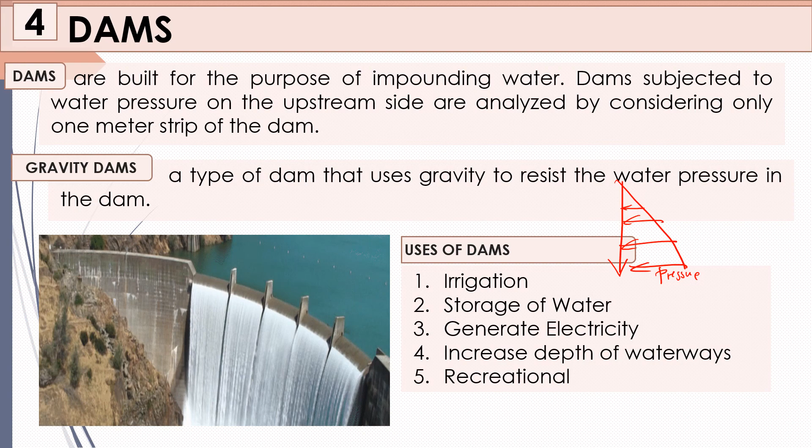We know that the deeper we go into water, the pressure increases. It is varying - the deeper, the larger the pressure. So this means that when we build a dam, we need a type of dam capable of resisting the water pressure given to it. One such type is the gravity dam.

Gravity dam is made of concrete, because concrete is the cheapest material to use. And where is concrete good? If we have pressure, water pressure, where is concrete good? Concrete is strong in compression.

That's right. So if we have water, it compresses or pushes the dam. If you push the dam, if the gravity dam is massive, because concrete is good in compression, it means the dam will not rotate. So imagine if the dam is not massive or its resistance to pressure is not enough, what will happen to your dam?

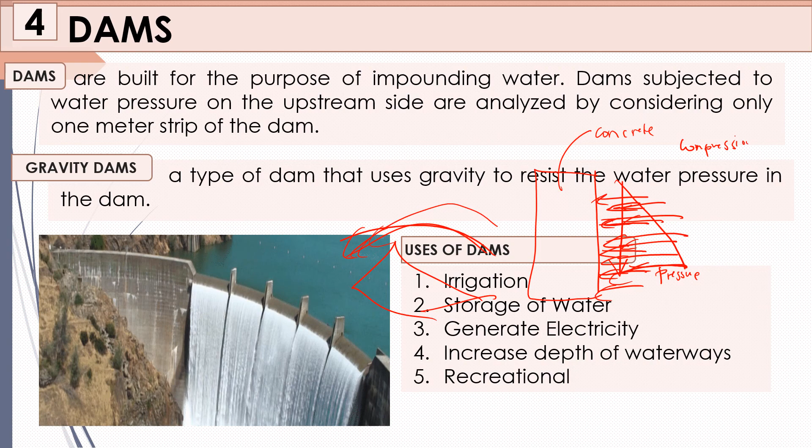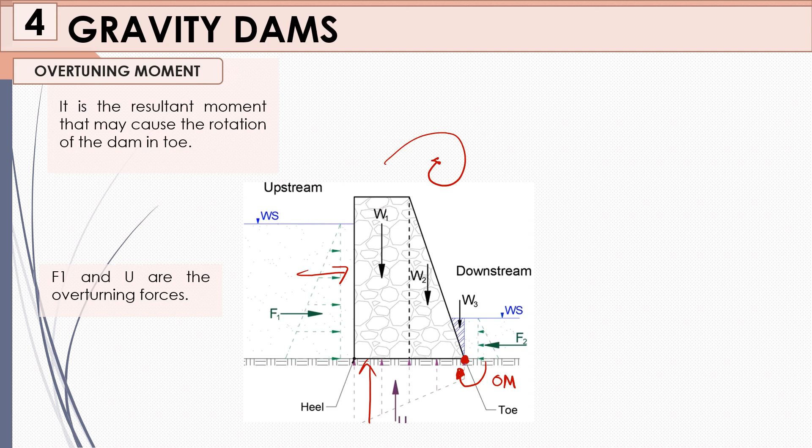At ano ang tawag doon? That is your resisting moment, or pwede rin natin itong tawagin as your righting moment. So itong righting moment natin will resist the overturning of our dam.

So, if your overturning moment rotation is clockwise, ano naman yung magiging rotation ng ating resisting moment? Kasi i-resist yung overturning moment eh. Yes, that is correct. That should be counterclockwise rotation, para ma-resist nga.

And sino ba yung mga forces na magre-resist or magka-counteract doon sa forces na nagbibigay ng overturning moment? Those are the forces, which is your gravity force, which is the self-weight or the total weight na kine-carry ng base ng dam natin, and also the F2. Yung F2 natin is yung hydrostatic force 2 ninyo. Tutulong siya sa pagpigil ng pag-rotate ng dam natin.

But if wala tayong tubig sa downstream, ibig sabihin wala tayong F2, so ibig sabihin yung magiging resisting moment or yung righting moment lang natin ay those gravity forces only. Okay, sana naintindihan yan. So sabi dito, solving for the base reaction of the dam.

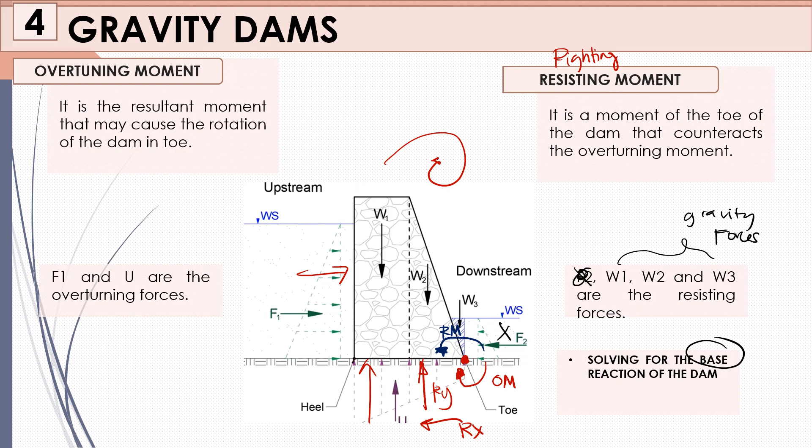So kung i-isolate natin, pag sinabi natin isolate, i-cut natin dito sa base ng dam. Isolate natin, and then ito na yung magiging projection. Nandito yung heel, hatiin natin ito. Ito yung center line ng base ng dam natin, so meaning to say, this is B over 2.

This is B over 2, that is base over 2. Overturning moment is clockwise, resisting moment is counterclockwise. Okay, now always remember na yung magiging datum natin sa data natin ay galing sa toe.

So kung kukunin natin yung vertical reaction of the base from the toe, the distance of that is x. Okay, the distance of your vertical reaction of the dam from the toe, that is x. So kunin natin yung formula. Derive natin yung formula kung paano natin makukuha yung reaction, yung location ng reaction x natin. Kasi sabi, find the distance of your Ry from the toe considering the base of the dam.

So let us try summation of moment at the toe equals to 0, taking clockwise as positive. O, di ba may Rx tayo dito? Since there are no horizontal force tayong nakikita dito sa base ng dam, matik, masabi natin dito pa lang sa base ng dam, okay, Rx equals to 0, it's because wala din itong vertical

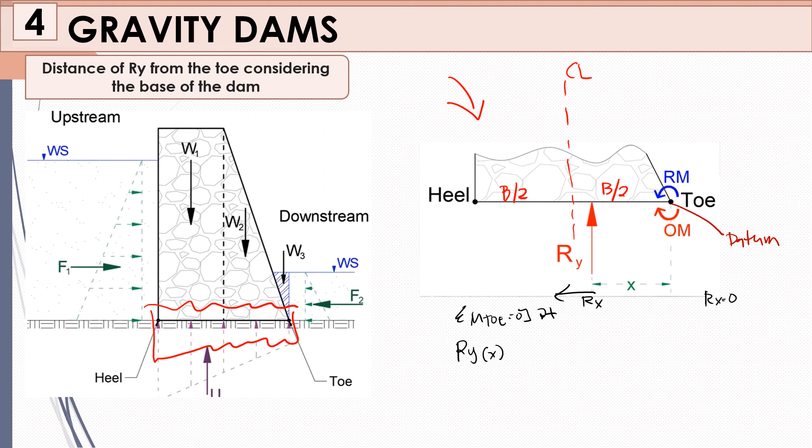distance. So that is Ry times x, ano pa ba? Plus your overturning moment, positive yan kasi clockwise, minus Rm equals to 0. Take note, yung x yung kinukuha natin ha, na formula. So ilipat ko ito sa other side of the equation, magiging Ry times x is equal to negative Rm, magiging positive Rm, positive Om, lipat natin, magiging negative Om.

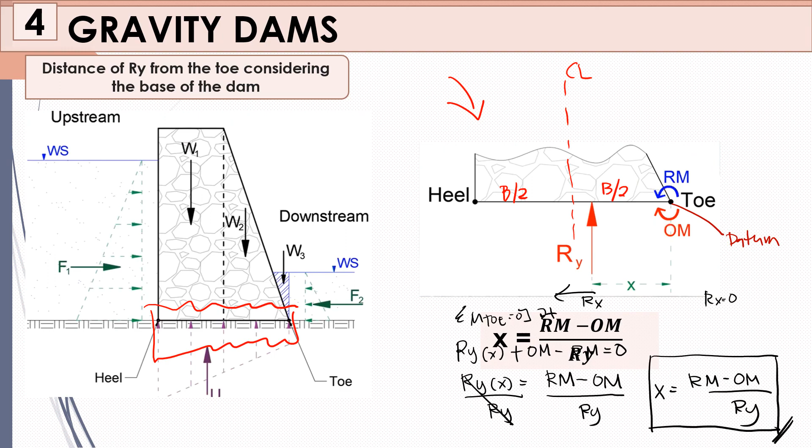And then divide both sides by Ry. Okay, cancel. Therefore, we can conclude that the formula for the distance of your vertical reaction from the base, galing sa toe ninyo, is Rm minus Om over Ry. So ito na yung formula na i-memorize ninyo. Pinakita ko lang paano dinerive yung formula. Okay, so from the center line, galing sa toe, x distance, makikita natin yung vertical reaction ng dam natin, base of the dam natin.

So how are we going to analyze the dam? So these are some steps na magiging guide natin. So first step is consider 1 unit length of the dam perpendicular to the sketch and identify the heel and the toe.

So, kapag kukuha tayo ng volume natin, that is base times height times length. According to step number 1, always remember na 1 meter length of the dam yung kino-consider natin when analyzing. So matik, yung value ng L natin is 1 meter or 1 unit. Pwede maging 1 inch, 1 foot, basta 1.

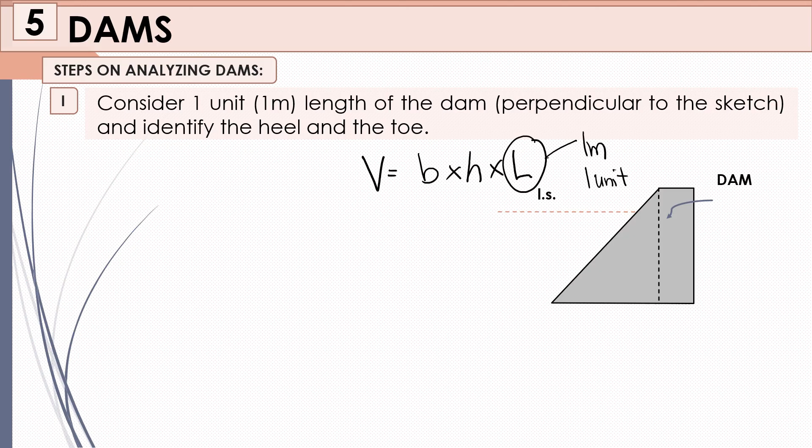Next step is to determine all the forces acting sa dam natin: the vertical force and the horizontal force. Hindi yan yung reaction. Determine all the forces acting sa dam - yan yung gravity force ninyo, double dapat to, yung hydrostatic force ninyo, and kung may uplift man, hanapin din natin yan.

Next is solve for the resultant force, that is your Ry and Rx. Next is moment about the toe - makukuha natin yung overturning moment at yung righting moment.

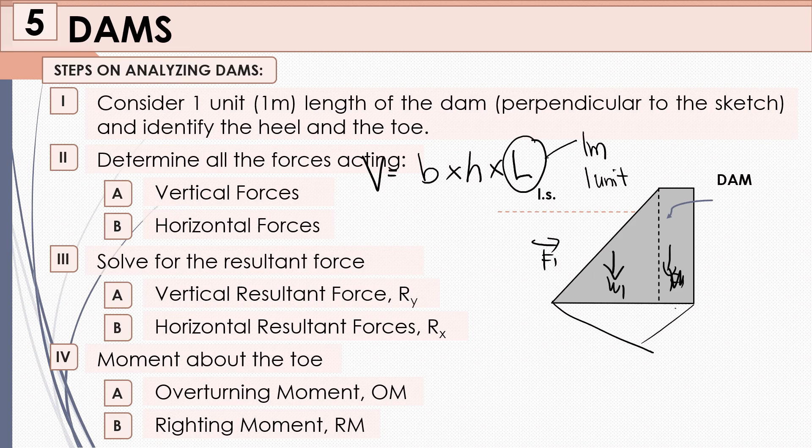Factor of safety - yan yung mga contingency natin para hindi mangyari yung mga failure sa ating analysis.

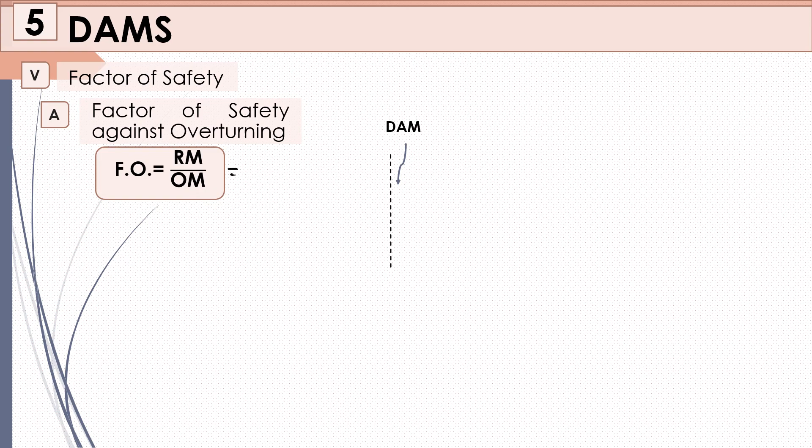So you have factor of safety against overturning, that is Rm over OM. Take note, kapag factor of safety, that is unitless, since kilonewton meter divided by kilonewton meter, cancel yon.

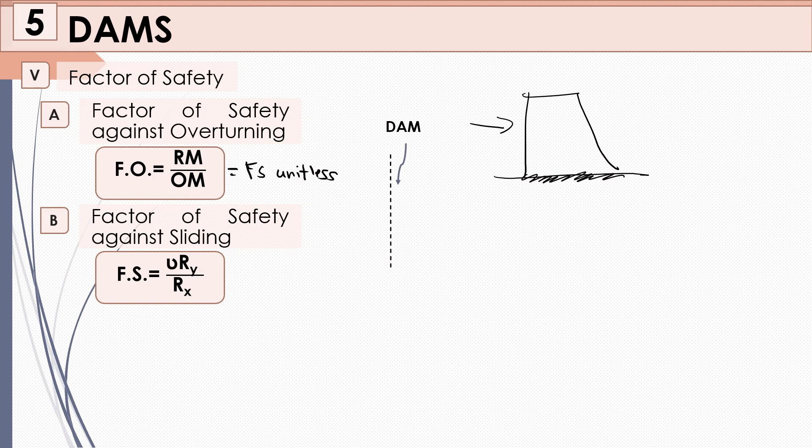Factor of safety against sliding, so you have mu Ry over Rx. Yung mu ninyo, that is your coefficient of friction. Diba yan yung pagkiskis between two bodies? So if this is the base of the dam and nandito yung dam natin, may pressure, ibig sabihin pwedeng mag-move or mag-tilt yung dam natin, magkakaroon ng kiskisan dito sa gitna - sliding, magsa-slide siya. So that is mu Ry over Rx.

And the formula ng location ng Ry natin from the toe, bago lang natin dinerive, that is Rm minus OM over Ry. So aside from determining the value of our Rm, OM, Ry, and Rx, we need to determine also the value ng foundation pressure.

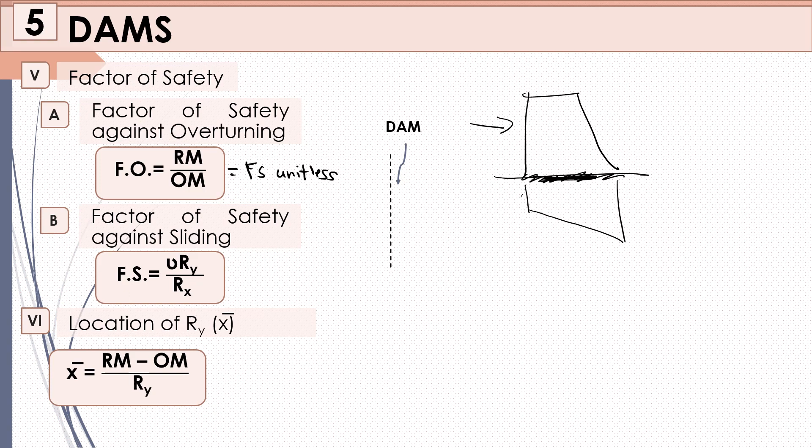Pag sinabi natin foundation pressure, yun yung nakikita natin sa baba ng dam ninyo. Parang siyang uplift force na nandito sa baba ng dam natin. So paano ba natin isa-solve yung foundation pressures sa ilalim ng dam natin?

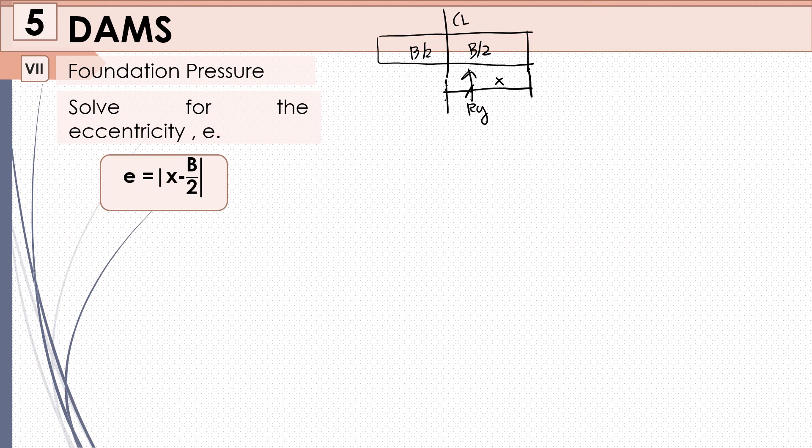First, we need to solve yung eccentricity natin. Bakit ba kailangan yung eccentricity? Kasi kung ito yung base ng dam, ito yung center line natin, this is B over 2, B over 2, at nandito yung Ry natin, o yung reaction ng base natin, at nandito yung ating distance from the center line. Kapag pupuntahan natin yung force, yan ba yung eccentricity natin? Parang sa hydrostatic forces on plane surfaces ninyo, this is your center line or center of gravity, nandito yung hydrostatic force. The distance between these forces and the center of gravity, that is your E or yung eccentricity.

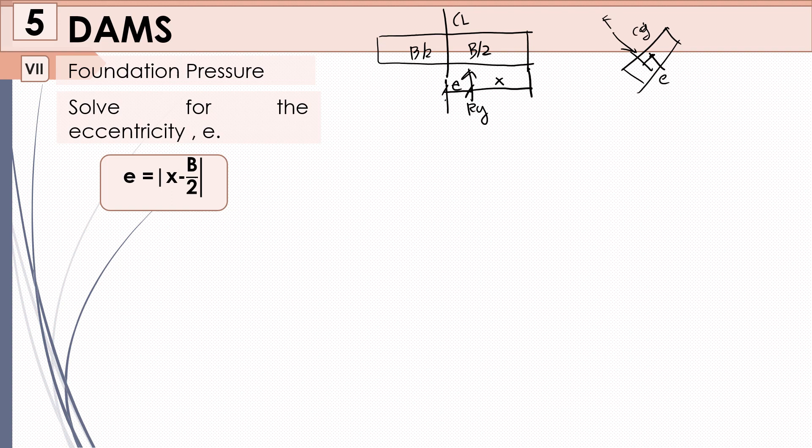So E natin, that is absolute value of x minus b over 2. Take note, absolute ito, kasi pwedeng maging negative yung answer. So absolute natin yan para maging positive, because we know na wala namang negative distance.

So how will we know kung yung force natin, yung pressure natin sa heel and toe, is maximum or minimum? Kasi pwedeng mangyari, sabihin natin dito yung heel natin, nandito yung toe. Pwede yung pressure sa heel is minimum, tapos sa toe naging maximum. Or vice versa, pwedeng minimum ang nasa toe tapos maximum ang nasa heel na pressure natin. Paano natin malalaman which is which?

Ganito lang yan - kung Ry is nearer to the toe than the heel, therefore the maximum is nasa toe. Ibig sabihin, kung nasaan mas malapit yung location ng Ry natin, doon natin makikita yung maximum na foundation pressure. Makikita naman natin yung distance kapag na-solve natin yung value ng E at ng X. Itong Ry natin is mas malapit sa toe, therefore the maximum is at the toe. For this one naman, yung Ry natin is mas malapit sa heel, therefore the maximum foundation pressure is makikita natin sa heel.

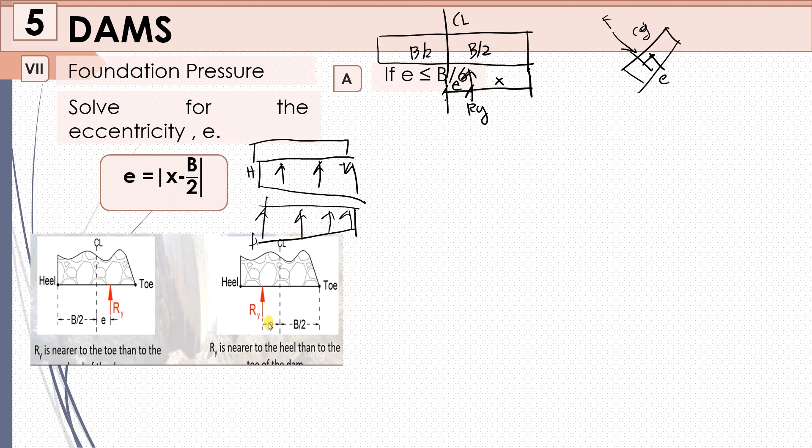Okay, but wait, there's more. May 2 cases for your foundation pressure. You have 2 cases if your E is less than or greater than B over 6. That is case 1 - this is your formula for Q min, and this is your formula for Q max, that is Ry over B, 1 plus 6E over B. Ang pinagbago lang naman dito is positive and negative. Case 2.

Case 2, if your eccentricity is greater than B over 6, automatically your Q min is 0 kilopascal. So madali pala, kapag case 2 tayo palagi, walang problema sa Q min, automatic 0 na siya. Well, yung Q max natin, that is 2Ry over 3x.

Again, paano mo malalaman if si heel or toe itong si Q min and si heel or toe naman tong si Q max? Madali lang, tingnan lang natin yung location ng Ry. If Ry is nearer to the toe, therefore toe is maximum. If Ry is nearer to the heel, therefore Q heel is maximum.

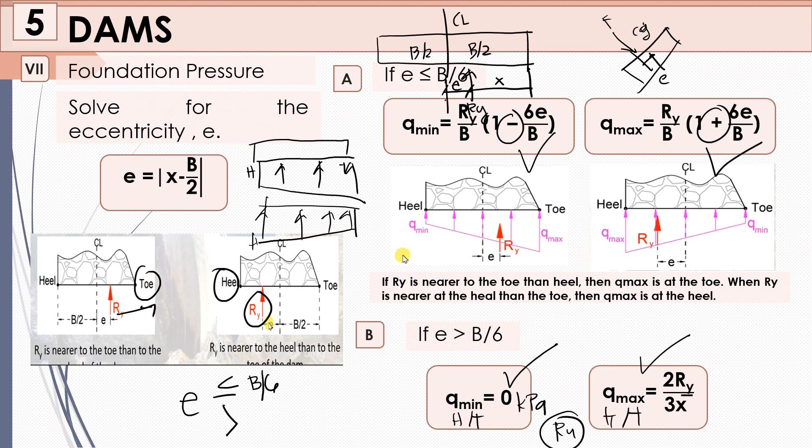Gets? So para mas maintindihan niyo, let us try to solve a problem, para ma-apply natin lahat ng steps na napag-usapan natin. Alright, question number 1, or example number 1.

You have a concrete dam, 4 meters at the top and 10 meters at the bottom, 25 meters high, and has water of 20 meters deep acting on its vertical side. The coefficient of friction between the soil and the dam is 0.60.

So ano yung tinatanong natin dito? Gaano kalayo yung vertical resultant galing sa toe, and that is x. Next is the soil pressure at the heel, that is your Q heel. And next is your Q toe soil pressure. Next is factor of safety against sliding and factor of safety against overturning.

Sige nga, for 1 minute or 30 seconds, try niyong i-drawing yung problem. Kasi kapag hydraulics and geotechnical engineering problems, mostly situational, puro worded problem, walang figure. So kinakailangan intindihin kung ano yung gustong mangyari ng problem. Sige nga, 30 seconds lang.

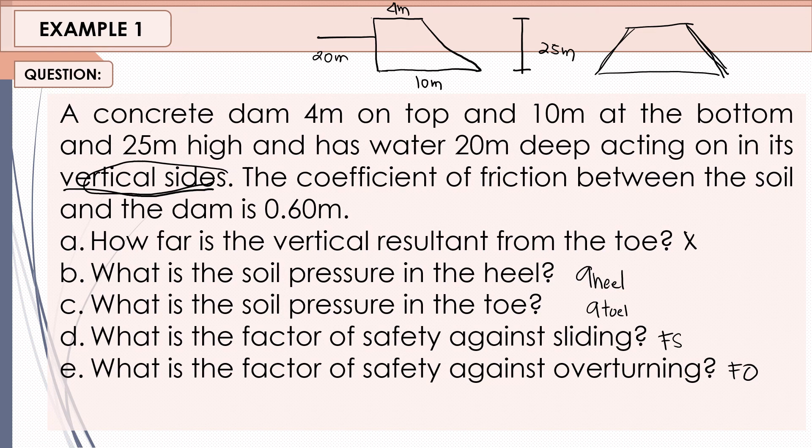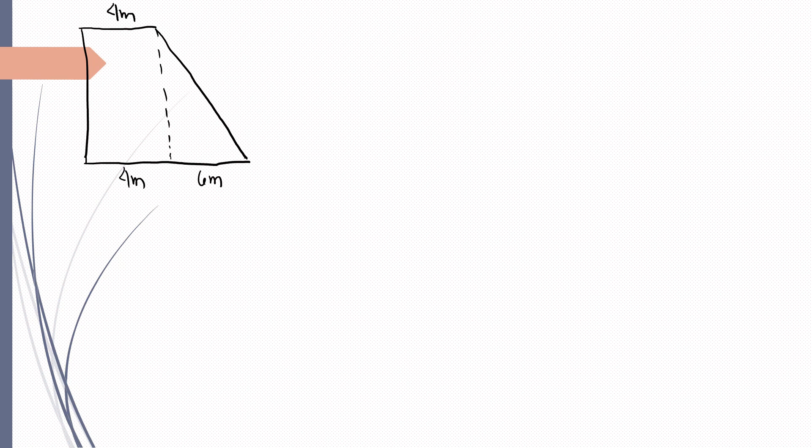Susubukan natin siyang i-draw ulit. Meron tayong dam, pagpasensya niyo na kung medyo tikwe yung pag-drawing. Okay, so this is 4 meters. Hatiin na lang natin yung trapezoid para 2 shapes tayo. So this is 4 meters, this is 6 meters. Total height natin, ilan nga yun? That is 25 meters. At sa vertical side natin, meron tayong tubig na ang height is 20 meters.

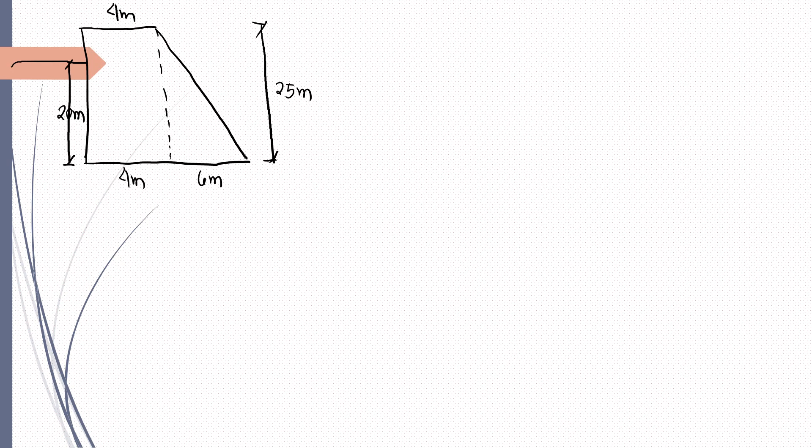Okay, so first question natin dito is to solve for the vertical reaction, the location of the vertical reaction of the dam. At ano ang formula ng x natin? That is Rm minus OM over Ry.

So assume na lang, let us try to assume. Sabihin na lang natin na siguro nandito banda yung Ry, nandyan yung Ry natin. Oh, ito pala muna, kung nandito yung upstream natin.

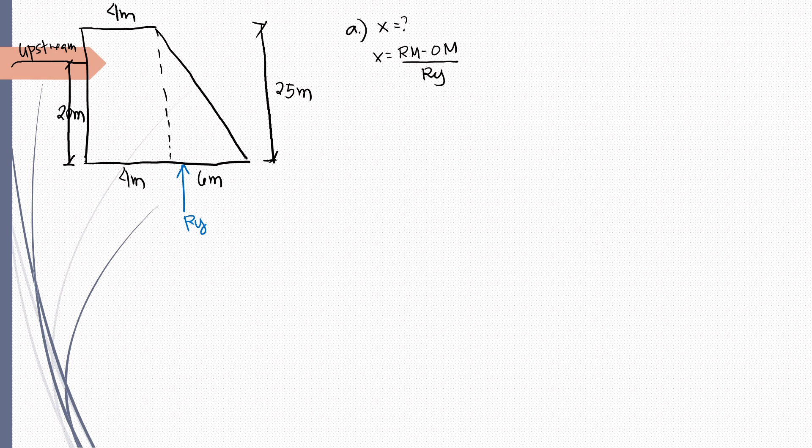Okay, nasaan yung heel? A or B? Saan yung heel and toe natin? Yung heel na lang muna, nasaan yung heel, A or B? Hindi ko naman kayo naririnig, pero if your answer is A, that is correct. Nandito yung heel natin kasi nandito yung upstream, therefore nandito yung toe natin. At always remember, yung datum natin is nasa toe. So if this is your Ry, ibig sabihin nandito yung x na hinahanap natin.

Ano nga yung first step natin? Our first step is to consider the length of the dam at 1 meter. Second step natin is to determine all the forces. Ano yung mga forces natin? Yan yung mga forces acting on the dam natin. Meron tayong weight 1 sa concrete natin sa dam, meron tayong weight 2. Ano pa? Yes, meron tayong isa lang na hydrostatic force, F1.

Okay, kunin muna natin. Paano natin kunin yung value ng weight 1 and weight 2? Balik tayo sa, ano ba, sa prelim, first topic sa prelim. Saan natin nakikita ang weight? Mass times gravity? May binigay bang mass? I think wala, so hindi natin pwede gamitin yung mass times gravity. Saan pa? I think sinasabi niyo dyan is unit weight or specific weight, and that is correct, that is weight over volume. Then kunin natin in terms of weight, that is gamma volume. Take note that the specific gravity of concrete, that is 2.4.

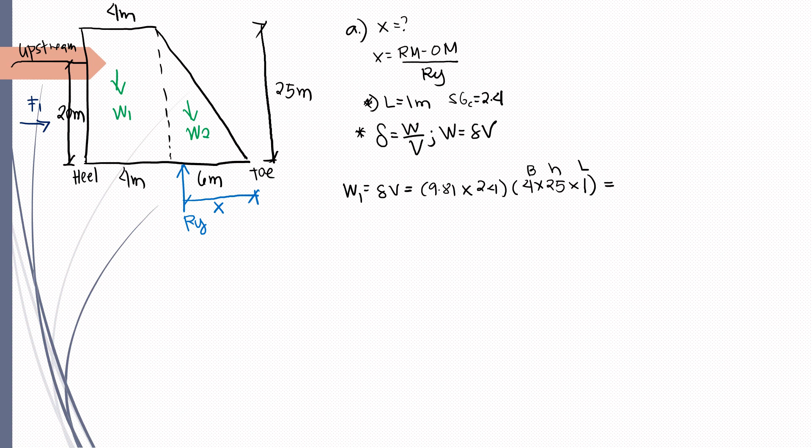Paki-check na lang, paki-correct. So, I think that is 2354.4 kilonewton. Paano naging kilonewton? Unit weight natin, that is kilonewton per cubic meter times volume, meters times meters times meter, cubic meter na to. Cancel, naiwan is kilonewton.

Alright, so let us try to get weight number 2. Gamma volume pa rin, so that is 9.81 times 2.4 times area nitong triangle na to. That is 1/2 times 6, yung base natin, 6 na, times height ng dam, wag malilito sa 20 at 25. Dam yung kinukuha natin, so height ng dam, that is 25, times yung length, which is 1 meter.

Value, ilan? Paki-check if that is 1765.8 kilonewton.

Okay, so F1, kindly get your hydrostatic force. Formula natin, that is gamma H bar A. So paki-pause yung video.

Okay, so I think na-pause nyo yan, so pwede pa rin akong mag-continue. So value natin dito, tubig naman na tayo, that is 9.81 times, anong H bar? That is 20 over 2. At ano yung area? O, that is 20 times 1.

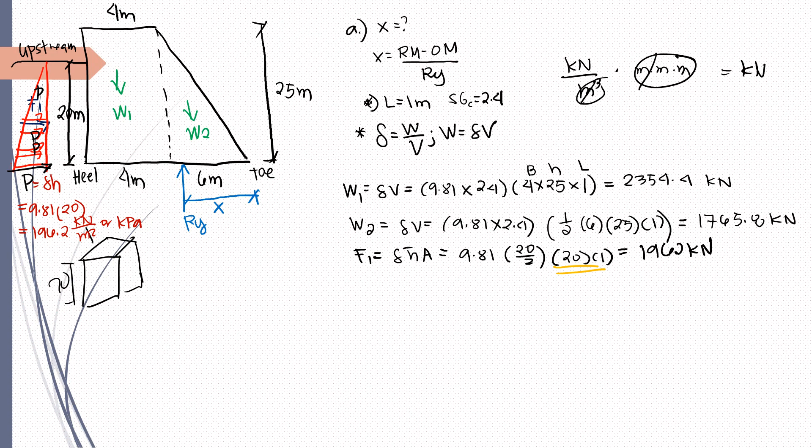Ma'am, mali ma'am, 1962 man ang sagot ma'am. Oh relax lang, kasi pressure pa lang yung nakuha natin. Ngayon tingnan natin ulit yung free body diagram, isolate ko yung free body diagram para mas klaro siya. Di ba ito na yung free body diagram ninyo? O, ang height nito is 20, yung base nito is 196.2 kilopascal, o kilonewton per meter squared. Tama ba? Kunin natin yung F1 ulit.

So using the area lang. Ano ba yung area niyan? Di ba triangle yan? So that is 1/2 times base natin na 196.2 kilonewton per meter squared times yung height natin na 20 meters times yung length natin na 1 meter. O, cancel na to, ang maiwan na lang is kilonewton.

So ilan yan? I think that's the same, no? That is 1962 kilonewton. So either way, parehas lang yung magiging sagot. So kayo na bahala kung saan kayo mas kampante, if the first solution or second solution for the hydrostatic force.

Okay, dami natin pinagdaanan, pero hindi pa natin nasa-solve yung value ng x. So ano ba yung kailangan ng x? That is Ry, Rm, and Om. So simulan natin sa pagkuha ng Ry. Paano ba natin makukuha yung Ry?

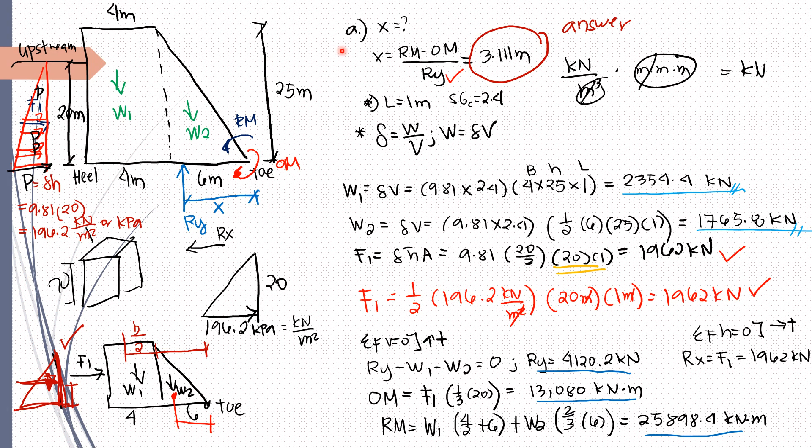Next question natin is, ano ba? What is the soil pressure, what is the pressure sa heel and what is the pressure at the toe? Okay, so next question is to identify the value of your Q heel and the value of your Q toe.

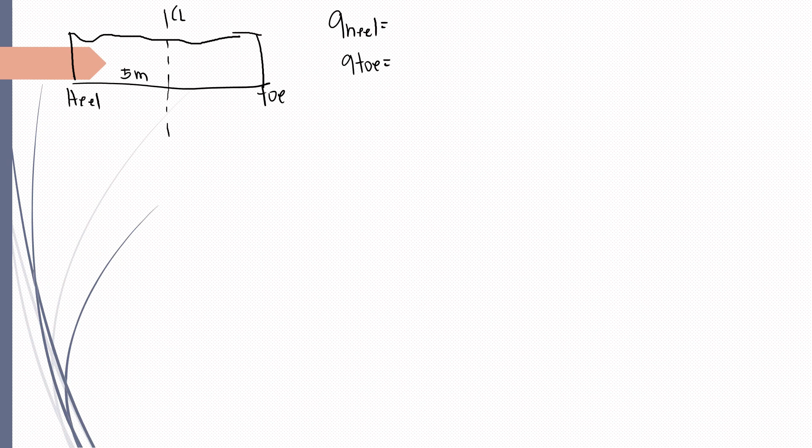So paano ba natin sisimulan hanapin yung foundation pressure niyan? That is to solve for the value of your eccentricity. Kung i-isolate natin again yung base ng dam natin, nandito yung heel, nandito yung toe. Sabihin natin, this is the center line. So 10 meters yung total ng base natin, tama ba? So hatiin natin, this is 5 meters, this is 5 meters. So from the toe, makikita natin yung RY ninyo, which is the distance is 3.111 meters.

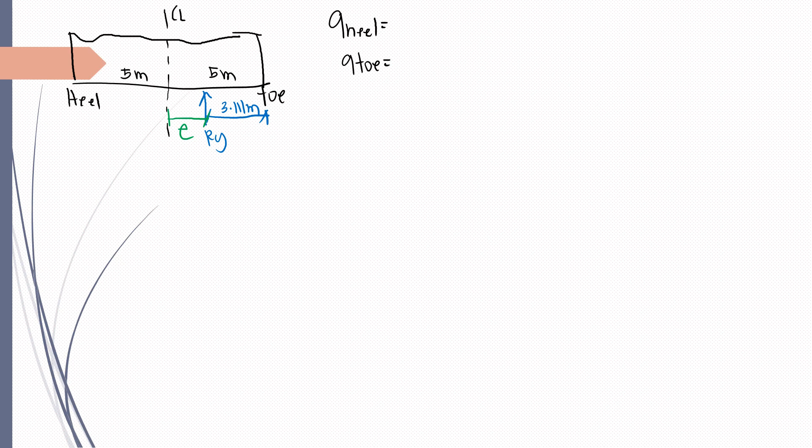At yung eccentricity natin is makikita natin from the center line papunta sa RY, ito yung E. So sabi natin, masosolve lang natin yung soil pressure kapag alam natin yung value ng E, or ng eccentricity ninyo. Okay, so what is the formula of your eccentricity? That is the absolute value of x minus b over 2. So paki-compute.

So the total value is 3.111 minus 10 over 2, and that is equivalent to 1.889 meters. Okay, so diba sa pag-identify ng ating minimum and maximum pressure, meron tayong case 1 and case 2.

So paano ba yun? Sabi dito, if your eccentricity is less than or equal to b over 6, that is case 1. But if your eccentricity is greater than b over 6, therefore that is case 2. So yung eccentricity natin, that is 1.889 rather. And yung b over 6 natin, ilan ba yung b over 6? 10 divided by 6.

1.667. So, ano tayo dyan? Greater than or lesser than? I think that is greater than. Eccentricity is greater than 1.667. Therefore, that is case 2.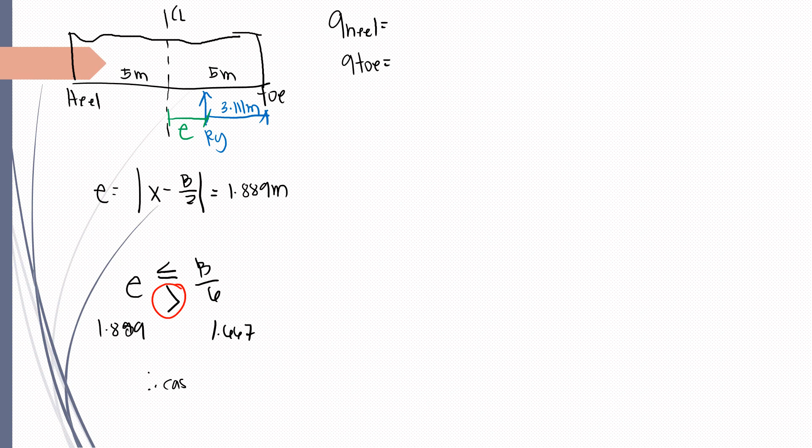Yun yung pinakaswerte na case. Bakit pinakaswerte? Kasi kapag case 2, Q min natin, that is 0 kilo Pascal. And yung Q max natin, that is 2RY over 3X dapat.

Okay, yung RY natin kanina, that is 4120.2. Yung X natin, that is 3.111. So, ilan dapat yung Q max natin? That is 2 times 4120.2 divided by 3 times 3.111. So, that is 882.932 kilo Pascal. Pero yung tanong kasi, hindi naman sinabi sino si minimum, sino si maximum.

Ang tinanong, sino si Q-heel at sino si Q-toe. So, based sa principle na sinabi natin kanina, paano ba natin malalaman which is which? Sino si maximum, sino si minimum?

Madali lang yan. Titingnan lang natin yung location kung nasaan mas malapit yung RY. Nakikita naman natin na yung RY is nearer sa toe. So anong ibig sabihin nun? If yung RY natin is mas malapit sa toe, ibig sabihin, yung toe natin is maximum. Makikita natin yung maximum sa toe.

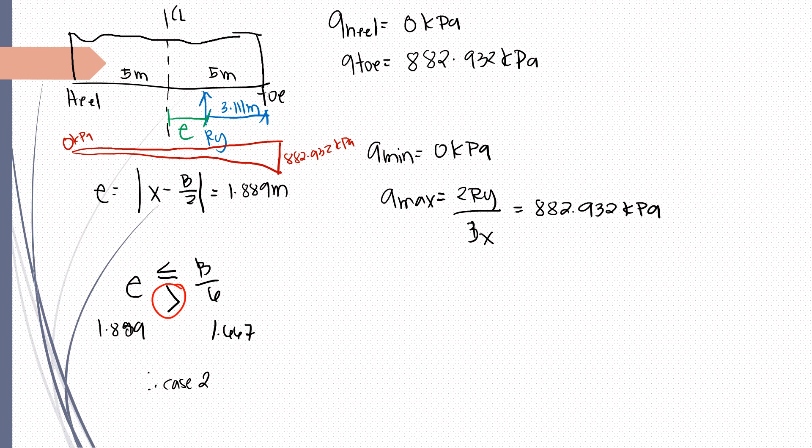Okay, nakuha na natin yung sagot, very easy. Ito na, answer na yan. Okay, last two questions is to solve for the factor of safety. Let us try to solve for the factor of safety against sliding.

That is mu RY over RX. Sa problem, yung coefficient of friction given is 0.6, your RY is 4120.2, and your RX is equals to F1, which is, I think, 1962. Can you solve for the factor of safety? That is equivalent to 1.26. Answer na yan. Take note that factor of safety is unitless.

Kilonewton divided by kilonewton, cancel lang yan. Next is the factor of safety against overturning. Meron tayong formula na RM over OM. Your righting moment, value of that is 25898.2, yun yung na-solve natin kanina, divided by your overturning moment, which is 13,080. So, no unit pa rin, unitless pa rin kasi kilonewton meter divided by kilonewton meter, cancel, cancel. So unitless talaga yung factor of safety natin.

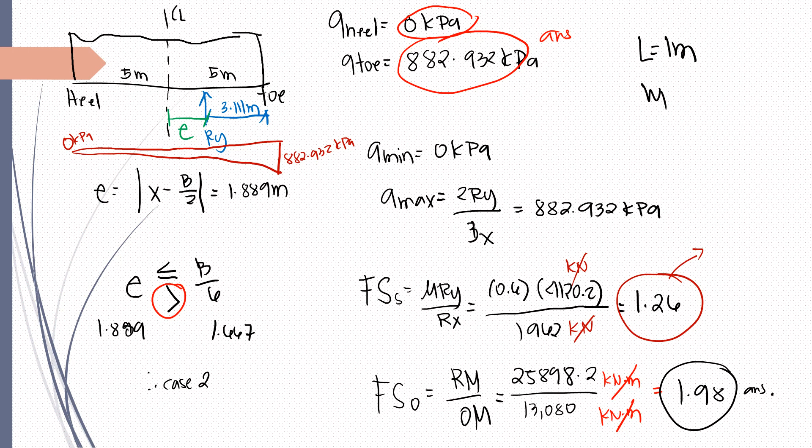So, you just need to memorize the steps. It's either way, kahit saan naman, kahit anong step yung unahin mo, okay lang. Basta don't forget step number 1 and 2, which is yung length natin is 1 meter, ibig sabihin yung mga forces na nakuha natin is every 1 meter of the dam. First na gagawin niyo is to get the value of the weights, the gravity force, and the hydrostatic force. And then, paano kapag binigyan kayo ng uplift force?

So that is your assignment on how you are going to apply the uplift force sa baba. Saan niyo makukuha yung uplift force? Siyempre, sa tubig, sa hydrostatic force ninyo. So that is your assignment. But we will discuss that one also during our face-to-face class sa sunod na schedule.